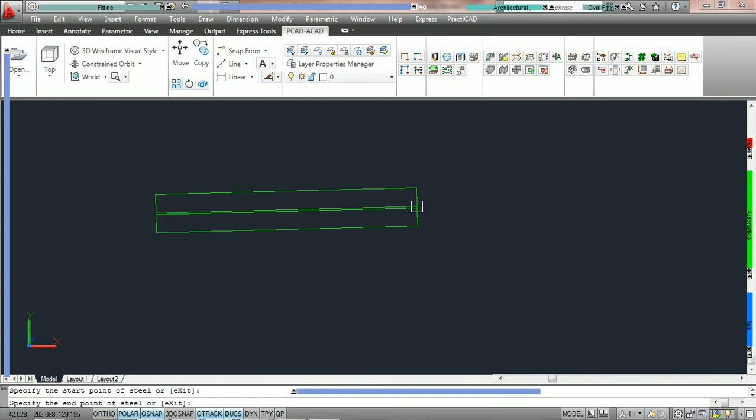Now at this point it's going to be much easier to draw the beam if you've got your polar tracking set on. So currently I have polar tracking set on. Also what we're going to do is we're now going to hold the beam in a specific direction, and we can choose whether we want to give it a distance or we want to just eyeball the distance. In other words, if we click right now, this beam will be exactly this long. However, we can also hold the beam in a direction we want to go and then type in the value we want the length of the beam.

For example, in this tutorial, we're going to type in 120 inches. You can actually see that being inputted in the command line. Currently, I'm typing in 120 and I'm going to hit enter. Once I do that, you can see that it's snapped so that this beam is actually 10 foot long. Now PractiCAD is saying to specify the rotation around the self axis. Beams can be rotated along their center axes.

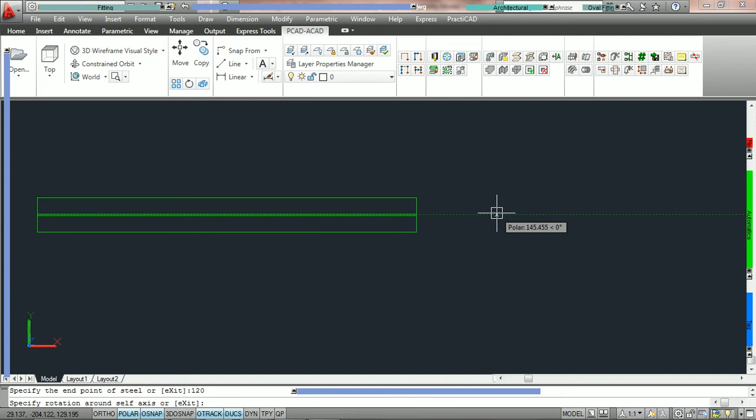If we've already got it at the rotation we need, we can just hold the cursor on the polar line and that'll keep it at 0. Or we could type in 0 and hit enter. And I'm going to type in 0 on the command line, hit enter. And now we've got a beam bottom at 10 foot. You'll also notice if we double click and go to the property box, you can see here that the length is 120 inches or 10 foot long. So that is how to draw a beam horizontal with one elevation point.

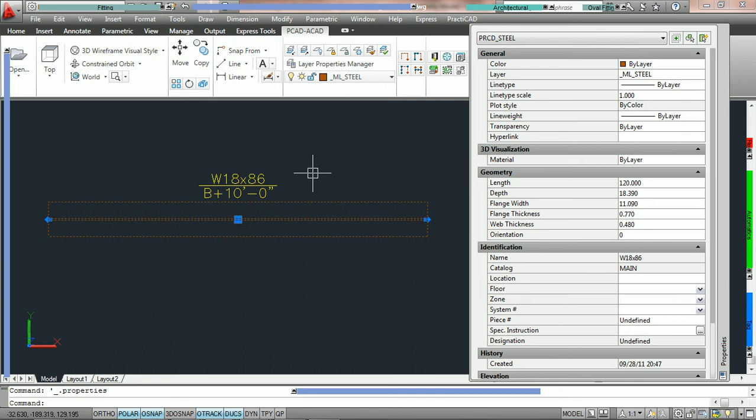How to place down steel between 2 columns. In this tutorial, we're going to show you 3 different ways to place steel between 2 columns and make sure you've got the proper elevation points. We're going to go into the architectural bin and we're going to grab a wide flange shape from a pre-existing catalog. We're going to click place.

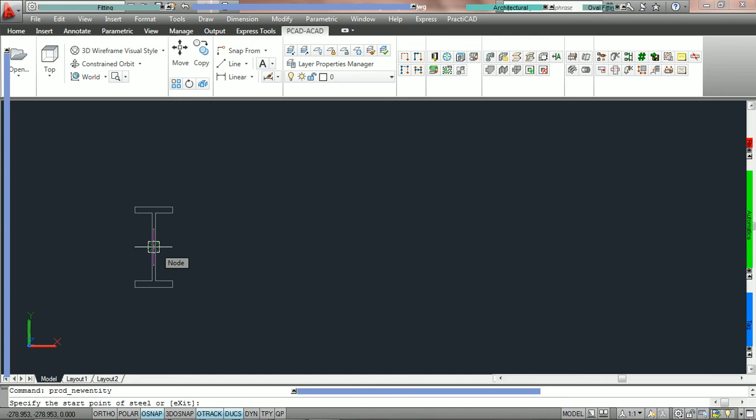Then we're going to come over to the item box. Notice the steel tab is depressed, and we're going to say to hold this beam by the bottom center because we want to attach the bottom of this beam and lay it on top of the column. Then what we're going to do is we're going to click between both columns. Now notice currently that we have node highlighted. We're going to click on the center node of one column, and then we're going to click on the center node of another column. And then we're going to hit 0, enter for the rotation.

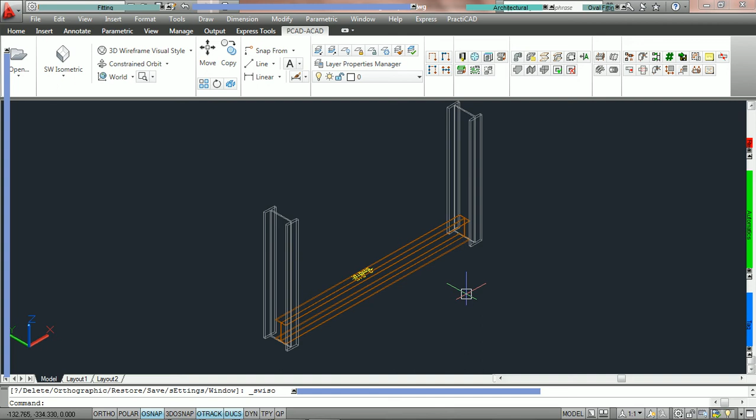Now notice that currently the elevation is at 0. It did not go to the top of the columns, which is where we wanted it. The reason is because columns have nodes at both the top and the bottom of the column. And AutoCAD is going to snap the entity you are holding to whichever node is closer to your current elevation. You can see that our current elevation was actually at 0. So AutoCAD actually snapped the bottom, or the point we were holding, the bottom center of the beam, to the node closest to 0.

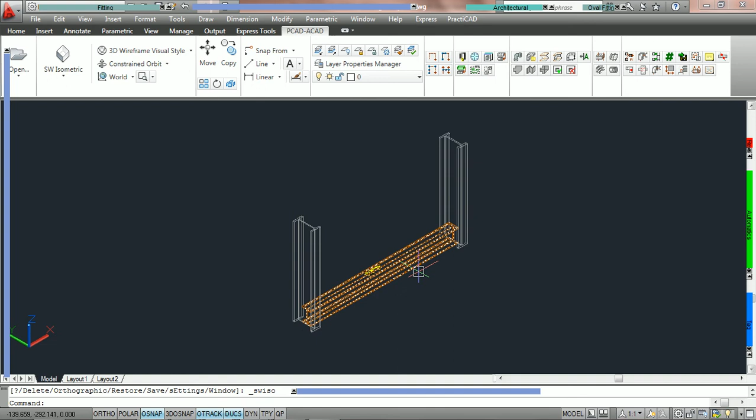So if we wanted to make sure that the beam was going to be placed at the top of the column, and we wanted to make sure it snapped to the node on top, one of the things we can do is just set our current elevation higher than the top of the column.

For example, we're going to come and grab that beam again. We're going to hit place, and this time we're going to take the red line, our current elevation, and set it to 100 feet in the air. We're going to hit enter. Now 100 foot is way above the top of our column.

But once we go to snap to this node, the nearest node available would be the node at the top of the column. So it's just a little trick. We can now click here, and then we can come over here and we can click this as well, hit 0, enter for rotation, and now we have the beam perfectly placed at the right elevation.

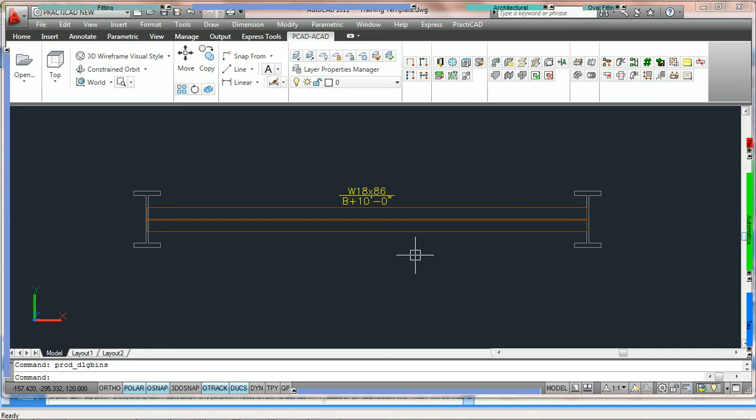Another method for making sure we get the right elevation is to utilize the Replace Z option. Now there are separate tutorials on how to use the Replace Z, but here we're going to show you how to utilize an existing automatic and give it the proper elevation and make sure everything's correct.

We're going to delete what we've drawn here, and we're going to go over to our automatic bin, and we're going to check the Z on button. That's going to be the AutoCAD or PractiCAD command automatic that turns Replace Z on.

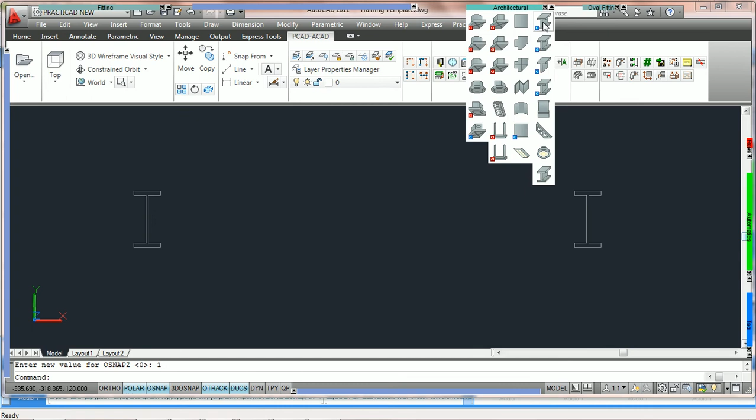When Replace Z on is active, basically regardless of what elevation a node is at that you snap to, PractiCAD is going to place down that entity you're holding at whatever your current elevation is, which means whatever you put in the elevation box. So what we're going to do is we're just going to come and grab a wide flange shape.

We're going to hit place, and we're going to put in exactly what elevation we want this beam to be. And that's going to be at 10 foot. So no matter what, wherever I place this on the drawing, no matter what node I snap to, regardless of where that node may be on the Z axis, when Replace Z is on, PractiCAD is going to follow the current elevation or whatever's in your red line in your elevation box.

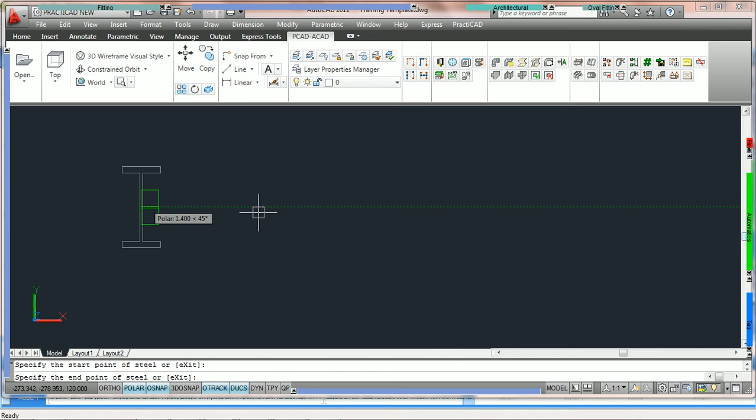So what we're going to do here is you can see that it's at 10 foot current. So all we need to do now is just simply click here and just click here, hit 0, enter, and you can see that because Replace Z is on, we have the beam at the right height. One key thing to mention is if you do utilize this, once you're done using Replace Z, you probably want to make sure that you do shut it off.

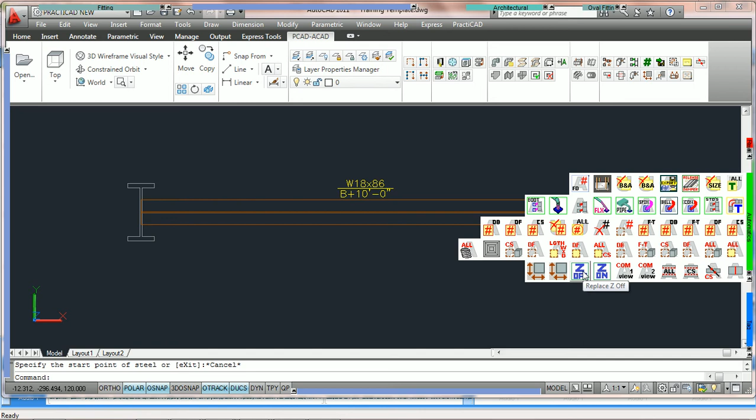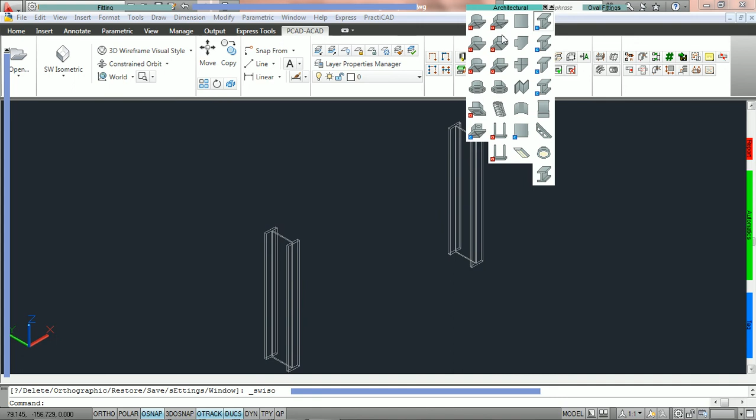The last option is to control our endpoint snaps to make sure that PractiCAD puts the entity at the proper elevation. PractiCAD offers an endpoint snap which rides at the top, center, and bottom of the column. We're going to go into isometric view, and we're going to grab a beam, and we're going to attempt to place it, and we're going to isolate the endpoint.

So I'm going to hold down the Shift key and right click, and we're going to go isolate the endpoint for this. And we're going to show you that currently PractiCAD is only highlighting one point, and you can see that the endpoint snap happens to be at the center of the column.

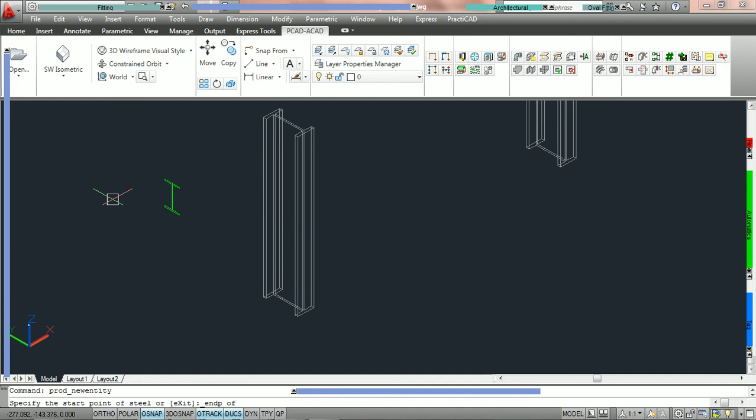And the reason for that is inside the item box, underneath the column tab, we have a place here that says snap to, just like we do in steel. And you'll notice that currently it says snap to Z center. Now the snap to has to do with the endpoint node.

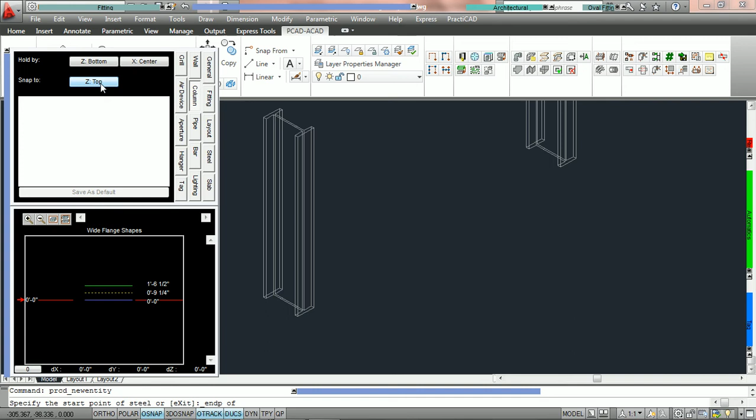And what that means is if we switch the snap to here to the bottom or to the top, that if we go to attach a beam and isolate the endpoint, only that node will be available. So once again, if we come over, see here that the node that's now available for the endpoint is at the top of the column. No longer is it available in the middle. So we can utilize that to put it at the right elevation.

So to demonstrate this, we're going to go back into the top view. We're going to grab a beam from our bin. We're going to hit place. We've already set the snap in the column tab here. It's already been set to snap to top.

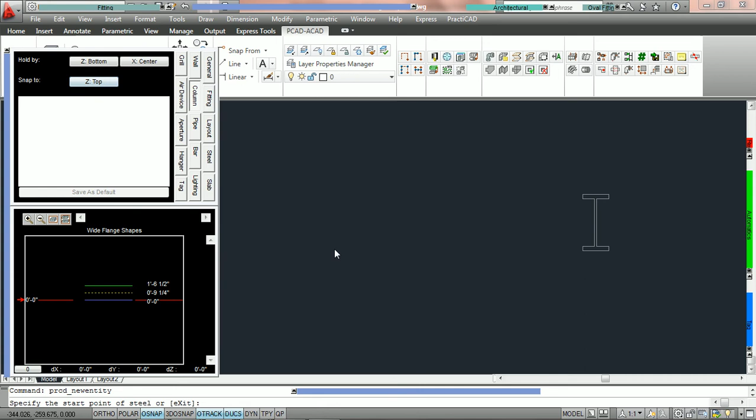So you can see that here we've got the current elevation at 0. But even though the current elevation is at 0, because the only endpoint node available on this object will be the top one, it's going to snap it to the proper place anyway. So what we need to do is we're going to hold Shift and right click to isolate the endpoint. And it's important to make sure we isolate endpoint.

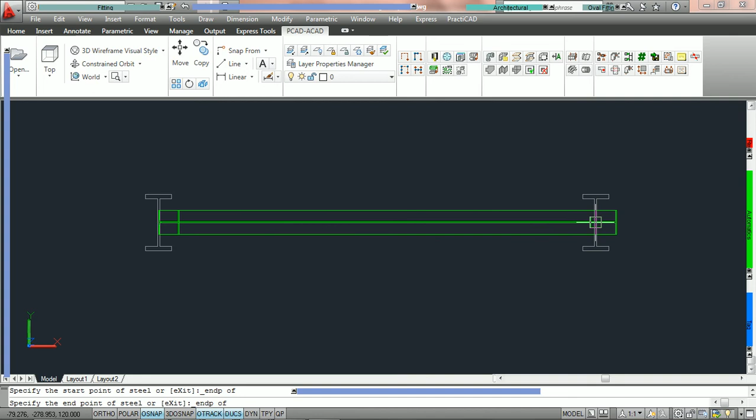And we can get a verification by just holding our mouse here. And you can see that AutoCAD's showing us that we're holding the endpoint. We're going to click once. Then we need to Shift right click again and isolate the endpoint for this connection. We hold it here. Once we see endpoint, we can click. Now after we rotate it, you'll notice that once again we are at bottom 10 foot where we want it.

So that concludes the 3 different methods to making sure we get the right elevation points when connecting between 2 columns or any 2 entities in AutoCAD.

How to place down steel using 2 elevation points. In this tutorial, we're going to show you how to place down slope steel using lines that are both at 0 feet to the drawing. In other words, an engineer has given us a background drawing. The background drawing is at 0.

We've got two lines representing steel, and we would like to attach a beam between them in the BIM model, but at a slope. Considering that both lines are at 0, we're going to have to use our dx, dy, and dz commands to offset the beam at the proper elevation. We're going to go into the architectural bin. We're going to grab a wide flange shape and click place out of our catalog.

We're going to come over to our elevation box and notice right here under dx, dy, and dz, all values are set to 0. That essentially means that our cursor is currently directly on the steel, and it's holding that steel by the bottom center in this tutorial.

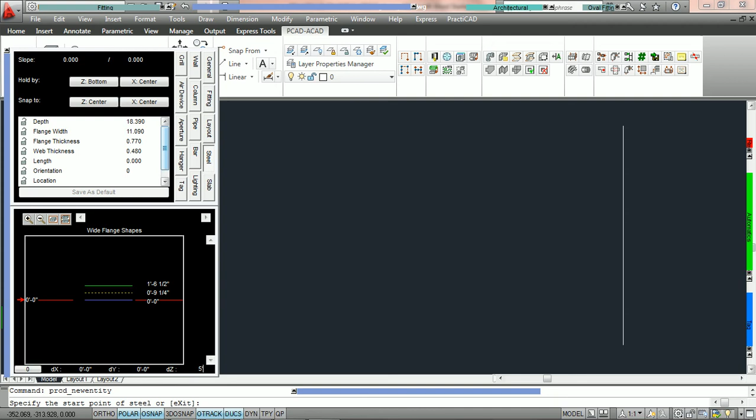What we'd like to do is place one side of the steel at 5 foot above this line and the other side of the steel at 10 foot above this line. By using two DZ offsets, we can accomplish this. So we're first going to go into the elevation box and put in DZ 60 inches. If you are using your format and precision in feet and inches, you could also type in 5 foot right here, and that will do the same thing.

We're going to put in 5 foot, and then we're going to click on this line. Notice I've got the nearest snap lit. I'm going to click once. What AutoCAD has done is it has actually taken this beam and snapped it to a point 5 feet above that line because of the DZ command we have.

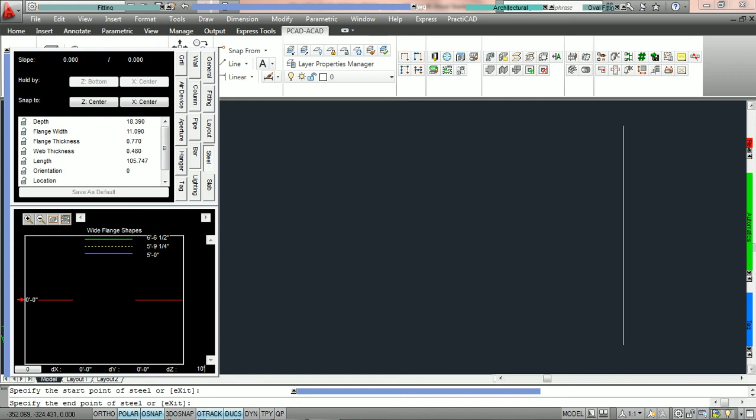Now we're going to change the DZ to 10 foot. And then we're going to go back over to the second line and hold it here. I'm using the perpendicular snap to make sure that everything's level. I'm going to click again, and then we're going to click for rotation. Notice that now we've got the beam bottom at 5 foot to start and the other bottom at 10 foot, even though both lines are flat.

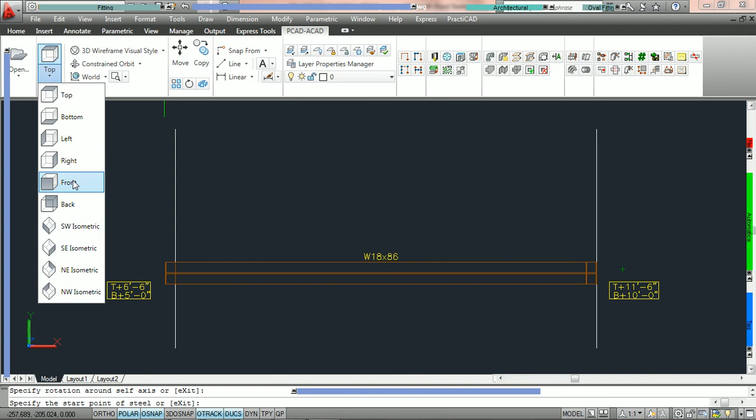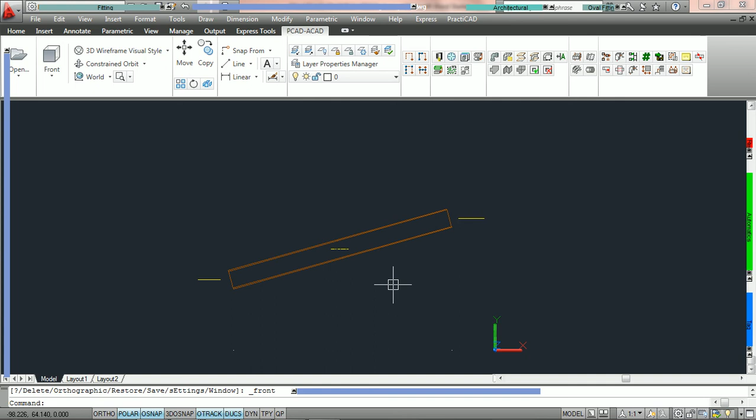This makes it very easy to draw slope steel between points, even if those points aren't at the right elevation. Of course, if you're working in a BIM or 3D model and you're snapping between 2 points that are actually at their actual elevation, you will not need to use offsets. However, if you are working with a background, using the DX, DY, and DZ keys can make it easy to get the proper elevation between 2 points.

One thing you must remember to do, though, is once you've used the elevation offsets and you're no longer using them, make sure you hit the 0 or reset key, which will bring all the values back to 0. If you don't do that, your crosshairs are going to be off whatever values you have in here when placing down duct and other objects.

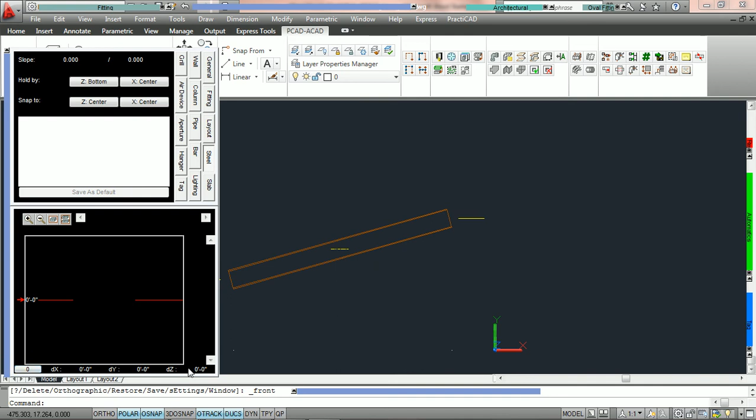How to draw steel using your Auto Steel tool. PractiCAD offers a tool that allows us to quickly take flat, two-dimensional steel drawings that are given to us by an engineer or architect and convert them into 3D PractiCAD drawings with the proper elevations. To do this, we must utilize our Auto Steel tool. In this tutorial, we have 2 lines on the drawing, and these are standard AutoCAD lines.

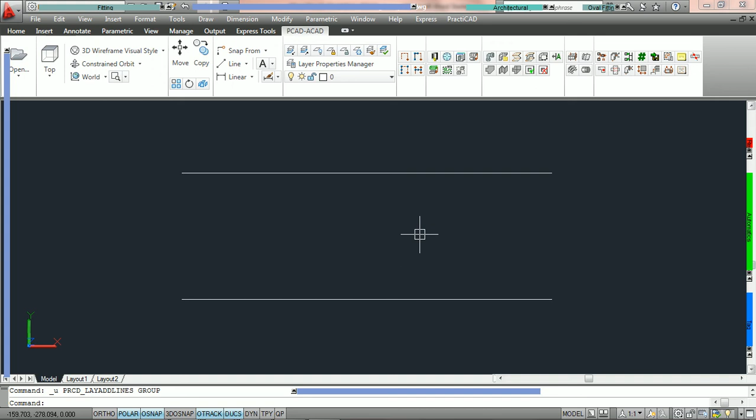What we're going to do first is convert these basic AutoCAD lines into intelligent PractiCAD lines. You will notice here that if we click on the line, it's got all the standard properties of an AutoCAD line listed here. Under geometry, we've got the start XYZ and all the following parameters. We're going to convert these lines to PractiCAD layout lines.

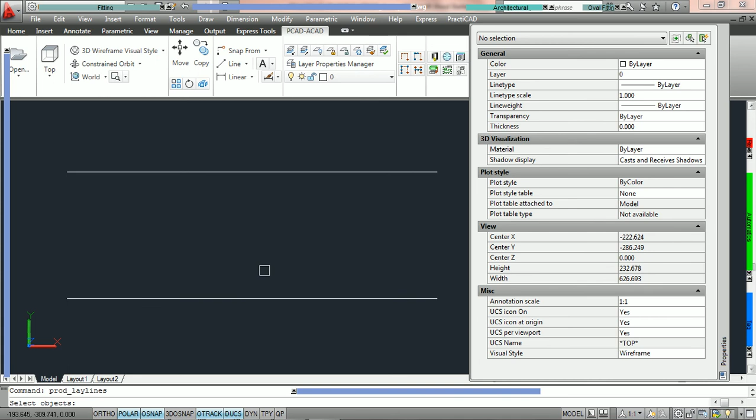To do that, we must go into the Create from Lines icon. This is located on your PractiCAD ribbon or Express toolbars. I'm going to click on it once. PractiCAD is going to ask us in the command line to select objects. Select both objects and then hit enter. You're going to know that we've converted the lines because PractiCAD will usually change the line's color because it moves it to a different layer.

Now if you click on the line, you'll see that it's under the PractiCAD layout line segment, and you can see that we've added geometry parameter airflow. We also have intelligent stretch nodes that have been added to this line too. Layout lines can be converted to duct, steel, or pipe. In this tutorial, we're converting them to steel.

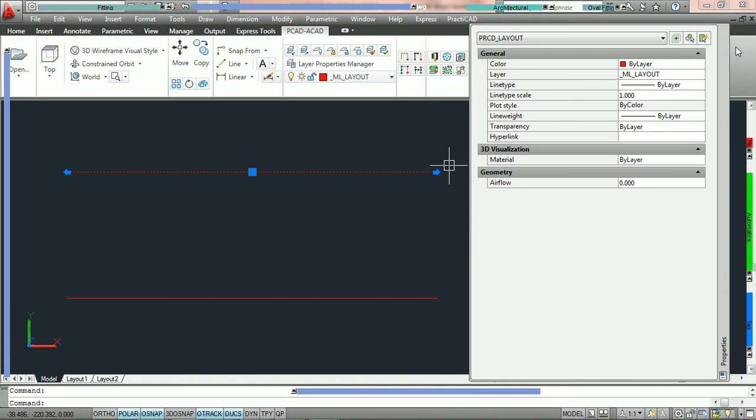Once we've got the layout lines converted, now we need to change them into steel. To do this, we're going to go over to the Auto Steel button in our PractiCAD ribbon. We're going to click on it.

Inside here, the first thing we must do is on the left-hand side, select the beam type we'd like to use. Everything will be listed here from all of your wide flange shapes to your H-piles all the way down to bar joists, which can also be utilized for conversion. In this tutorial, we're going to open up wide flange shapes and we're going to pick a W36 by 194.

Now we have to choose all of the rest of the parameters on the right. The first choice should always be set to top. Normal top means that if we're in plan view, the top of the beam should be looking directly at us. If we were to switch this to front view, it means the top of the beam would be looking directly at us if we were looking at the drawing from front view. And the same with bottom, left, and right. 99% of the time, we always leave normal set as top.

And the way this auto steel button works is whatever settings you have here, the second time you open it, the settings will be saved. So this is usually set to top, and it's very rare that I would ever change it. Next, we have rotation angle. In other tutorials, we show you how to rotate steel. We can have these beams come out, converted, and rotated if you'd like. Most of the time, the rotation angle I have selected is at 0.

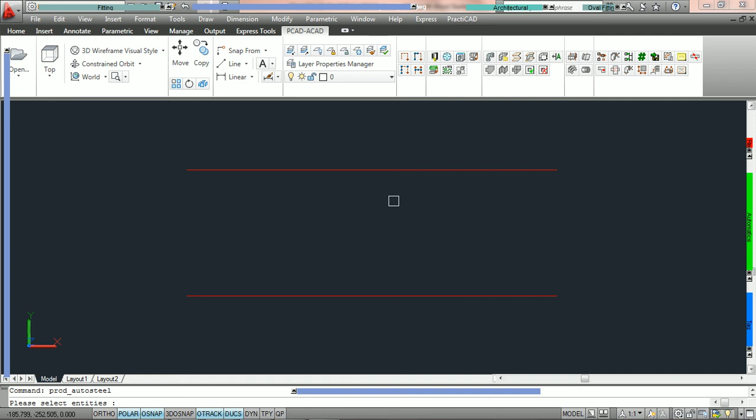At this point, it says to please select entities. And we can select as many entities as we want, and PractiCAD will convert them all at the same time. We're going to start by just clicking on this one line and then hitting enter. When we do that, PractiCAD has converted that line into a W36 by 194. The bottom is at 10 foot.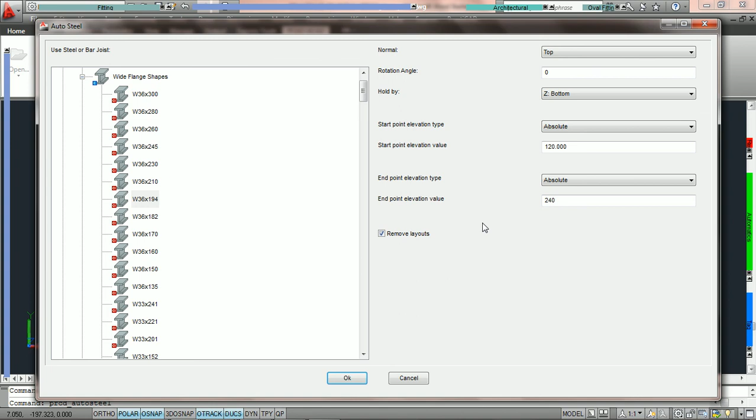To do this again to represent a slope, we're going to go back into Auto Steel. Notice that the settings are exactly where we left them. It always picks up the last settings used. We're now going to say endpoint elevation is going to be 240, so 20 foot. And we're going to say remove layouts, which will remove the layout line when we're done. We're now going to press OK.

We're going to click on this line and hit enter. When we do that, you can see that PractiCAD has placed a W36 by 194. And here we have the bottom at 10 foot on one end and the bottom at 20 foot on another end. That is how to utilize your auto steel button.